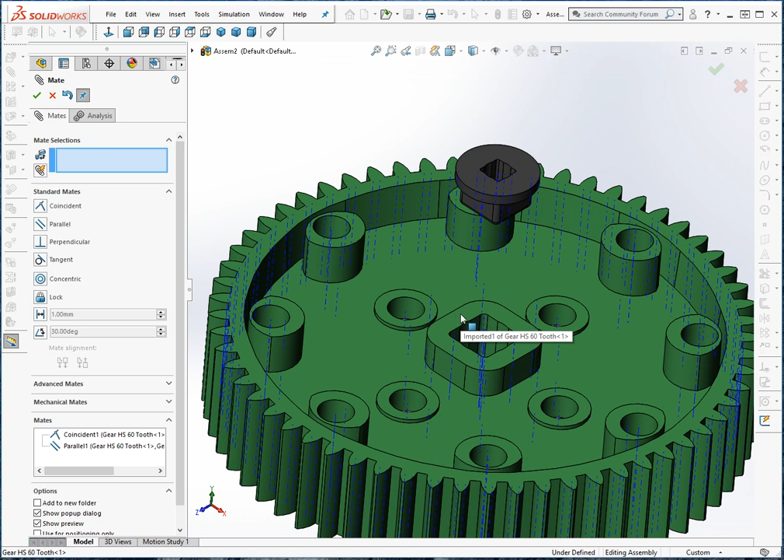So I have this insert that I notice I can't rotate independently of the gear - the flat side here is parallel to the flat side there. I have the axes lined up, and now I just want to constrain it so it's flush up against here. So I'll pick this face right here, and let's zoom in a little bit over here and pick this face right here, and that's what I want. So now we can see that insert is in there properly.

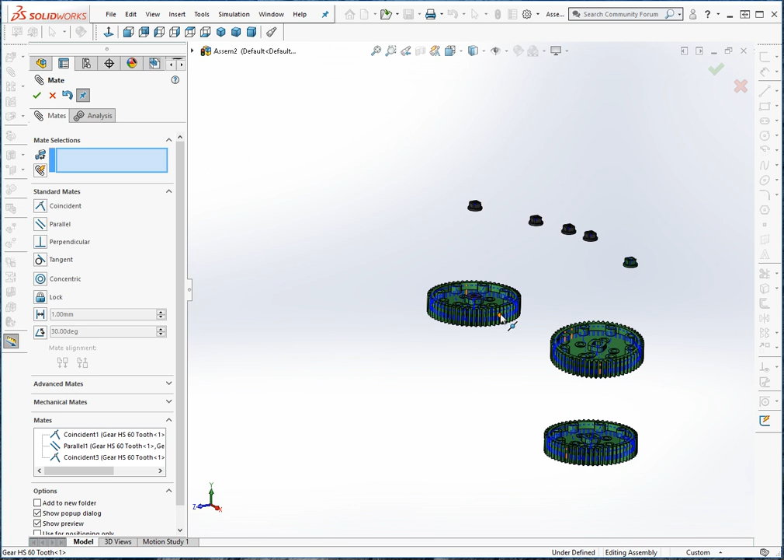I'm going to do the same thing with these other two, but on this one, remember that this insert just had the round, not the square.

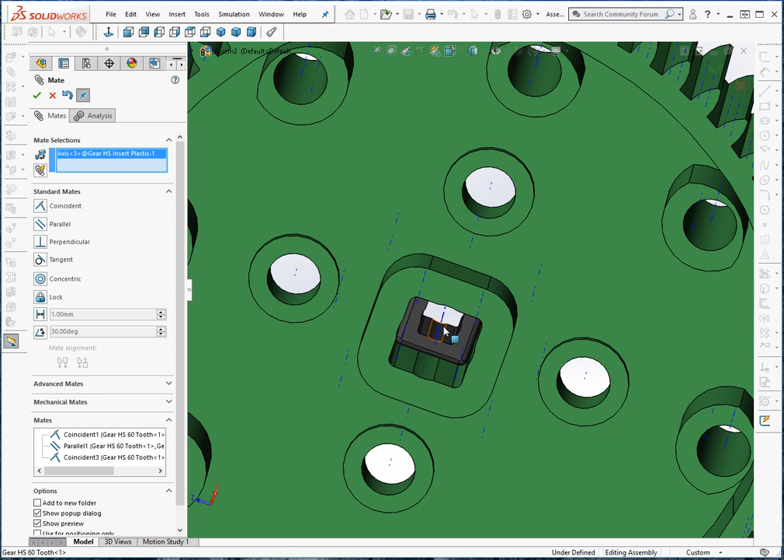So I'll go ahead and pick that axis, right, and then I'll zoom in back over here. Again, I just want to make sure I get the right axis. So there's the axis that I want right there, and I'll accept that. Let's see where that other one is - so that's down here, so I got to bring this down over here.

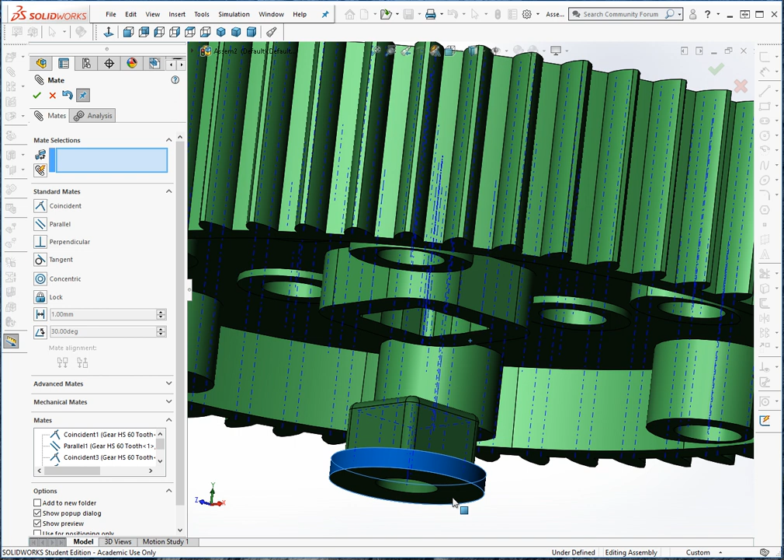And then what I want to do again is make that face parallel with, say, that face right there. Okay, so we'll accept that. And then I'm just going to drag that out a little bit. I want to take this face right here and make that flush with this face right here.

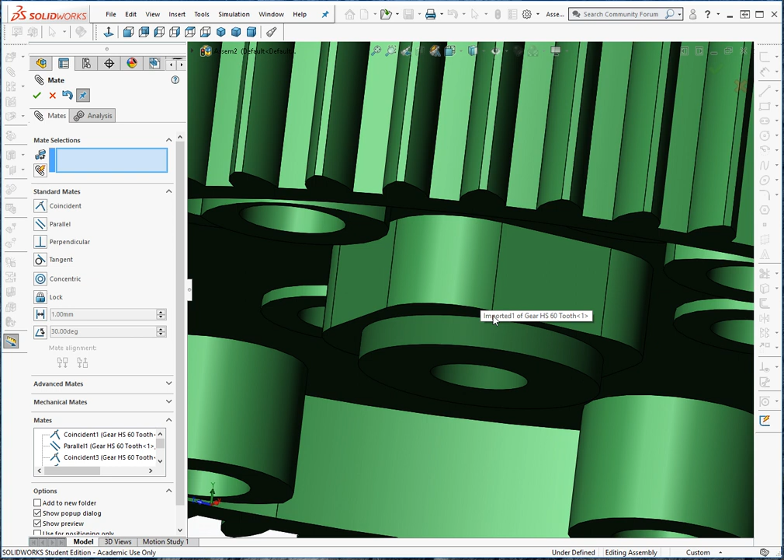Okay, I'm going to turn off the visibility on this temporary axis just for a minute, just to make it a little easier to see. All right, so what do we got now? So we have that insert flush up against there, and if I pick on this face right here, I can hit this little button here, and you can see that's lined up okay.

And then on the other side, if I do shift and the left arrow here, I can rotate 90 degrees. Okay, so here's the other side with a square insert.

Okay, so at this point you should be able to go ahead and put the inserts in the other two, right? So we still have these four inserts here, and you can put one on each side of those gears.